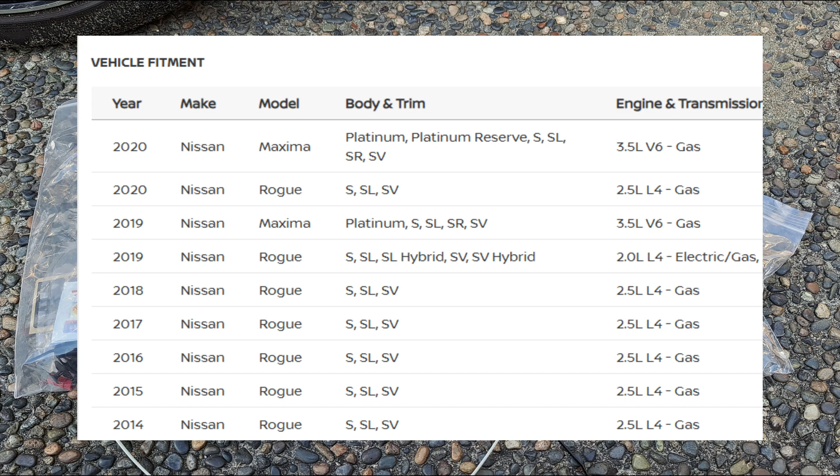In this video I will be installing an underglow LED light for my 2018 Nissan Rogue. This kit is compatible with different Nissan vehicles from 2014 to 2020, as you can see in the vehicle fitment right there. I believe this kit can be installed in a different car as long as you have the right harness for your vehicle model.

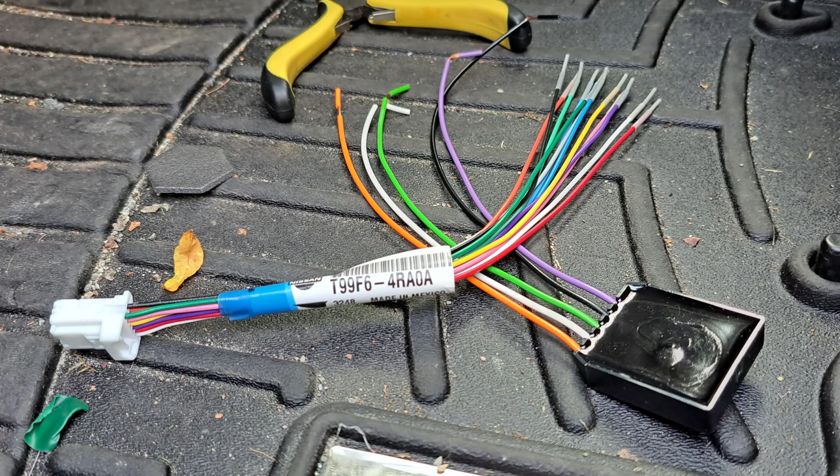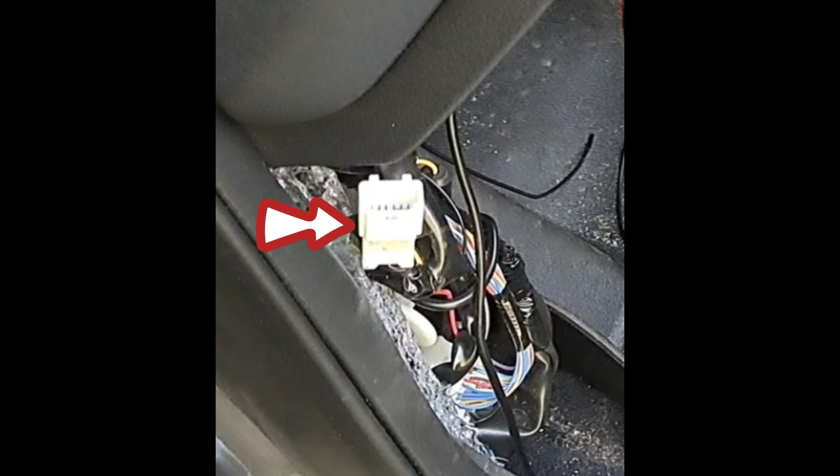By the way, the kit does not come with a harness, so you have to buy it separately, but I would recommend checking the harness connector in your car first. You might have one pre-installed already. It's usually located on the driver's side. You just have to remove the corner kick panel.

The kit comes with everything that you need for installation: connectors, rubber grommet, etc. Again, aside from the harness that is specific to your car model.

Nissan has very good detailed instructions. I will leave the link in the description below. Also take note that the location when placing the sticker guide for drilling holes is a little bit off if you follow what the instruction says, but if you do exactly how I did it in this video, you shouldn't have any issue at all.

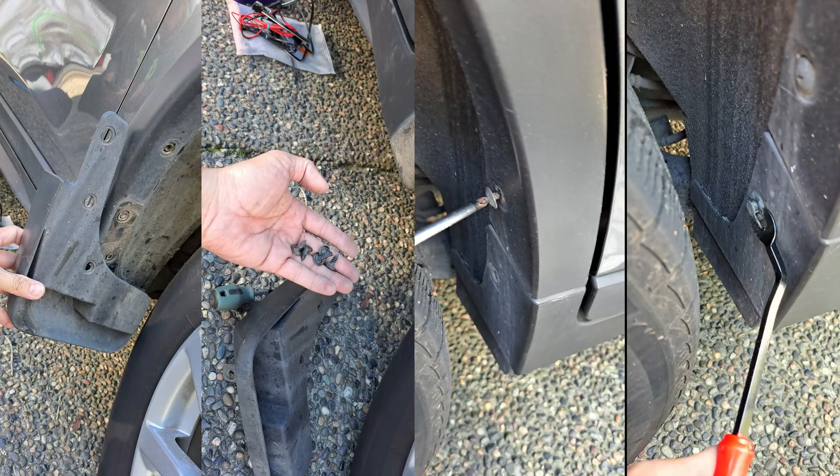So now let me go ahead and show you how I installed it. I started with the passenger side by removing the front mudguard that was held by 3 screws. At the back, you will have to remove 1 screw and 1 push pin.

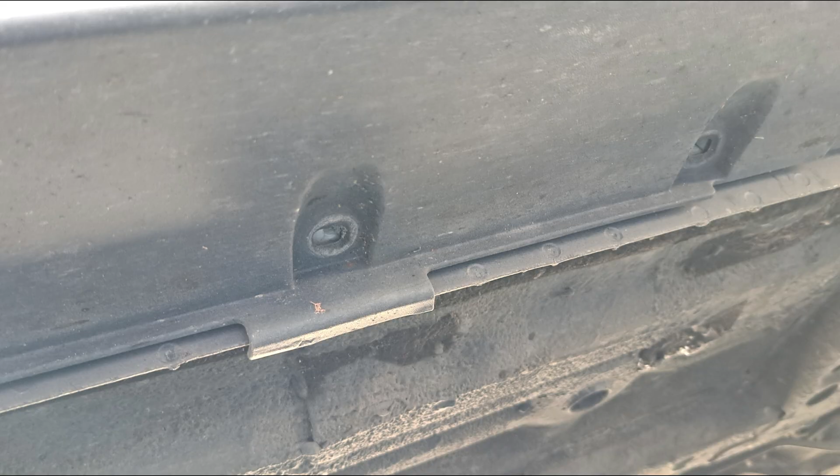Underneath the car, there are 8 or 10 gray screws - sorry, I forgot to count them correctly. Alright, so there is a push pin right here, right there. I don't know how many until up to the front, but you just have to push it down and then try to yank it towards you, and it came off. I'm not sure how easy it is to put back later on, but it's right there.

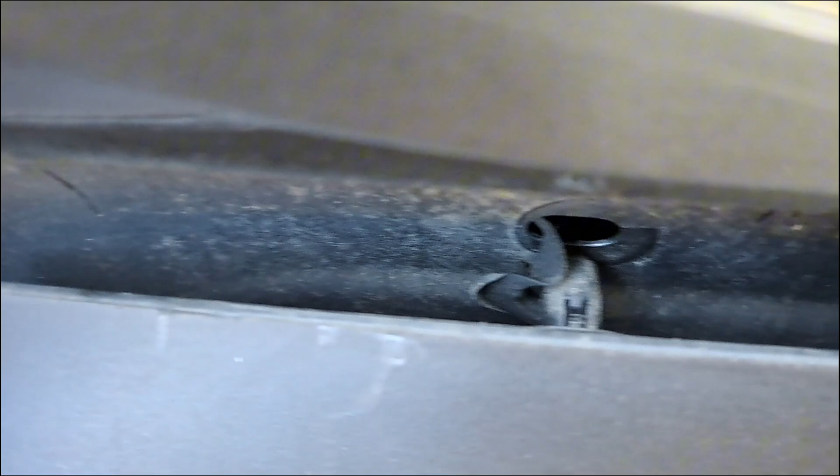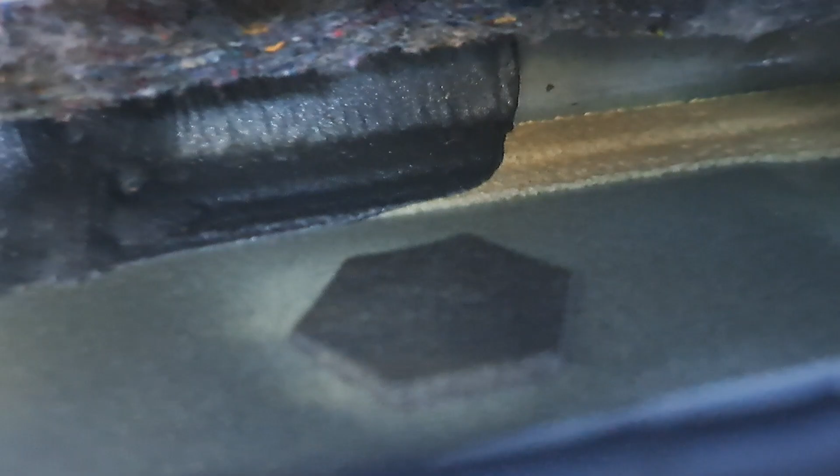From the outside, underneath, the wire is gonna go there. So I ended up removing the trim all the way because I thought there's another hole here at the front, because when I removed this, the first one here, there's a double wall, so there's no hole right there. So the one that you have to remove is the second one from the front. You guys can see right here, you just have to remove this cover here. So I'm gonna put this one back to the very front, and this is what we need here.

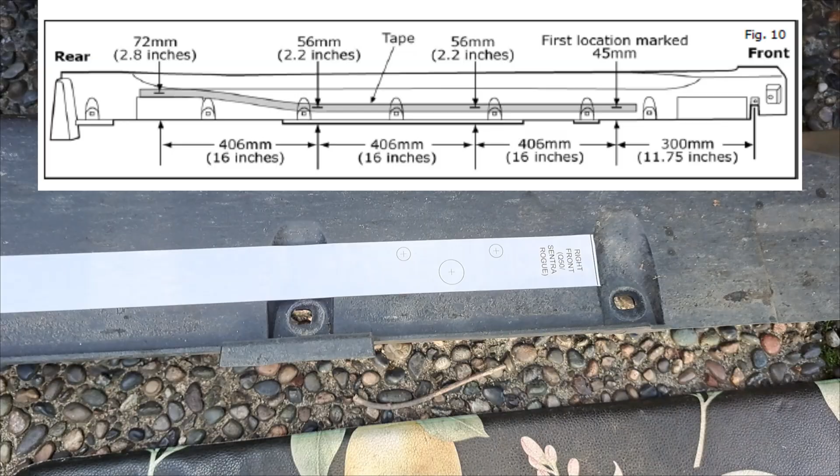So following the Nissan instruction on how to place that drill tape guide, you can see that it is totally off and it's very close to the screw hole, so I moved away the tape and it works perfectly fine.

The LED has orientation, so make sure that you are using the correct sticker. It is labeled specifically for the right, which is the passenger side, and the left for the driver's side. So the first one I already did. Now I'm gonna show you the second one just to save time, because I was trying to make sure that I'm using the right size of drill.

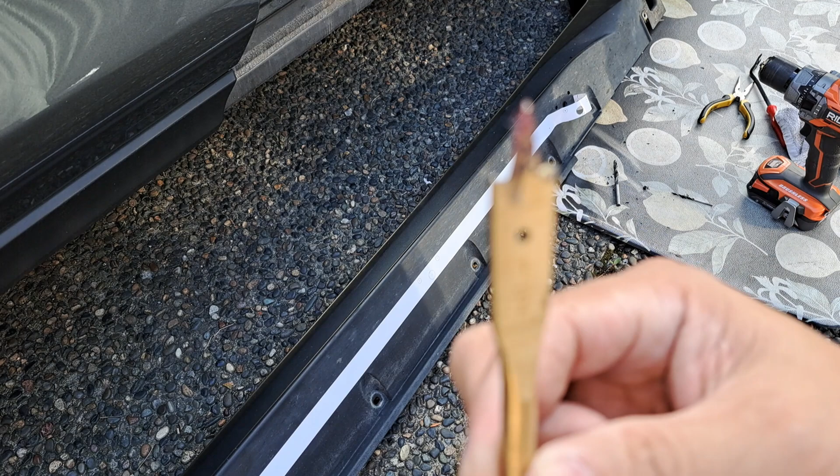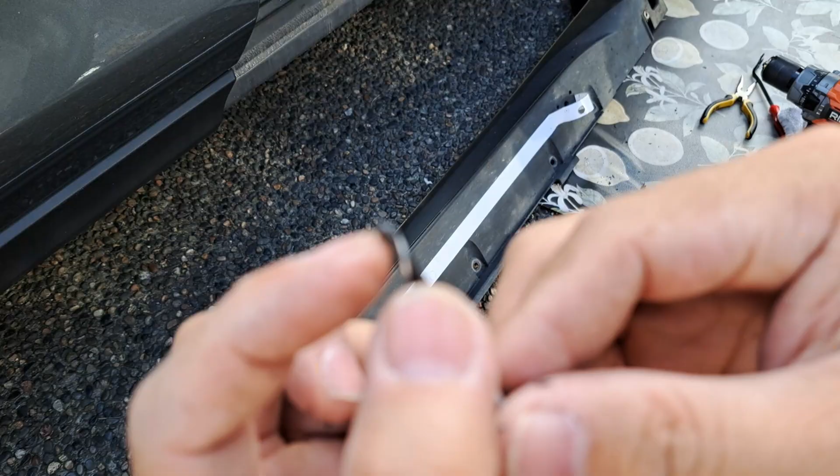So for the LED itself, the size of the drill bit that you have to use is 1/2 inch. I use this kind because it's much faster. This is 1/4 inch for the push pin hole right there. I have a set of drill bits, so that's easy for me. What I did is I started with a small one, because I'm drilling plastic, I use the wood type drill bit because it has a little pointy tip, so it's really easy to start drilling. So again, I'm gonna start with a small drill bit.

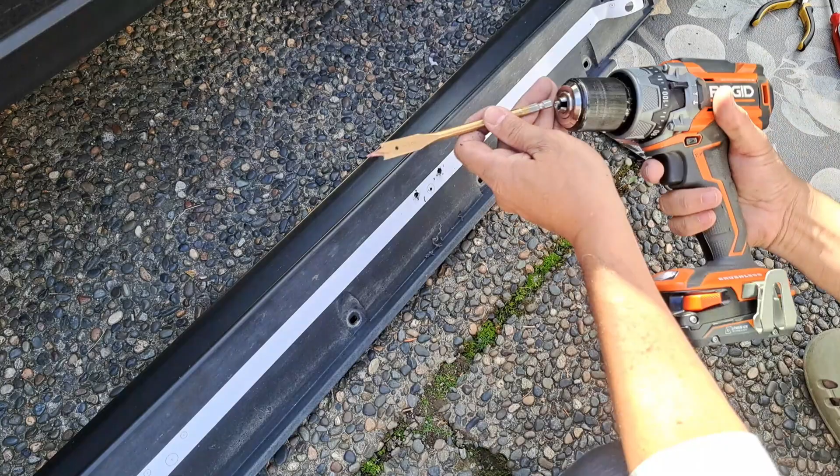The instructions said you could easily drill it while the splash guard is on the vehicle, but I don't want to accidentally drill through the chassis of the car. I'm going to leave the link in the description below for the installation instructions so you guys can check it out before starting.

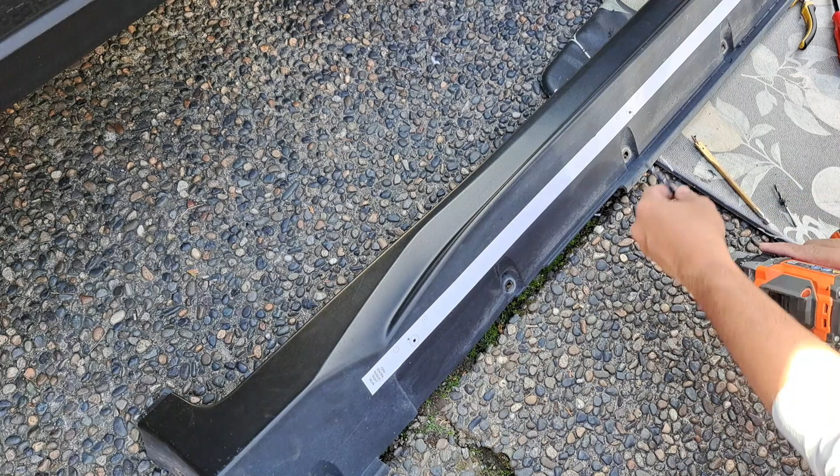Alright, so now let's drill all of them, and then I'm gonna show you guys how the LED lights fit. I'm not gonna use the small one for the push pin, because for this one here I'm also using the wood type drill bit.

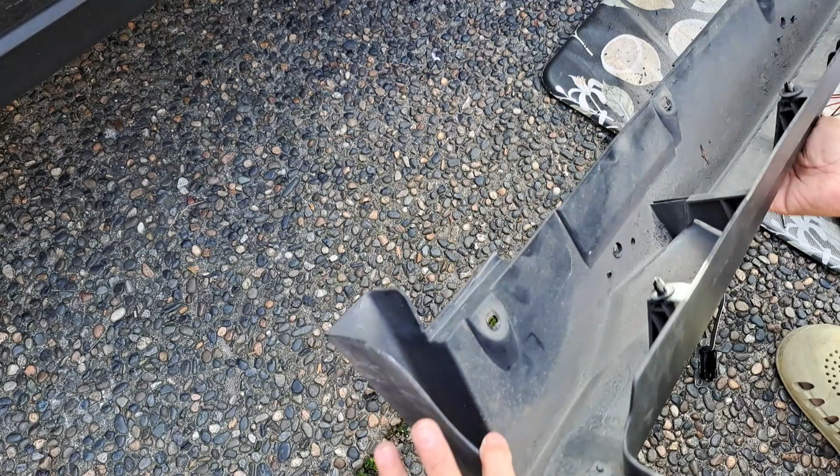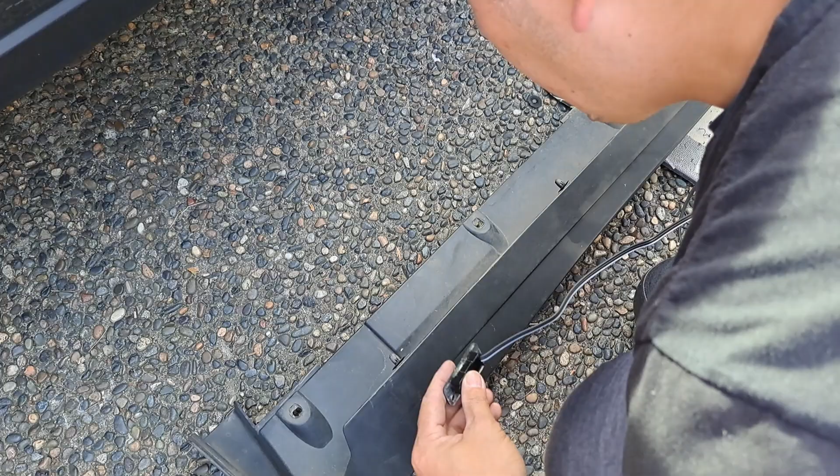Also pay attention to the stickers. It says right front right there, so make sure to use the right one. So this is the one for the right, and it fits perfectly right there.

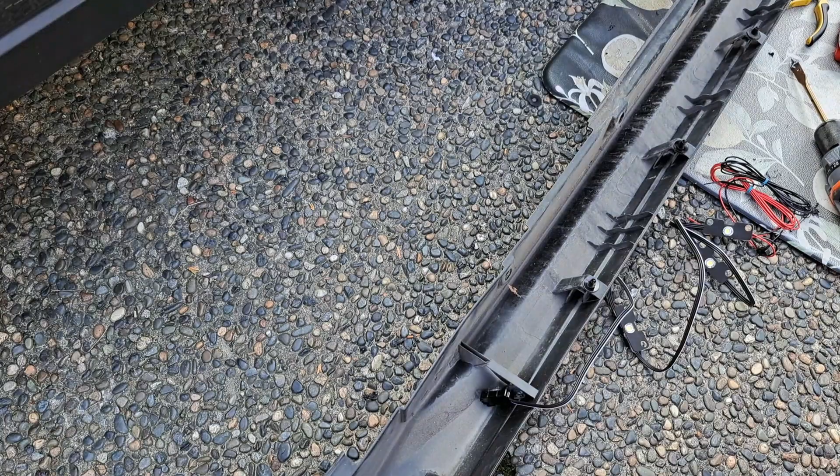And you guys see that it comes with the push pins, so let's try to install it now. You guys can see what I'm doing. Just like that.

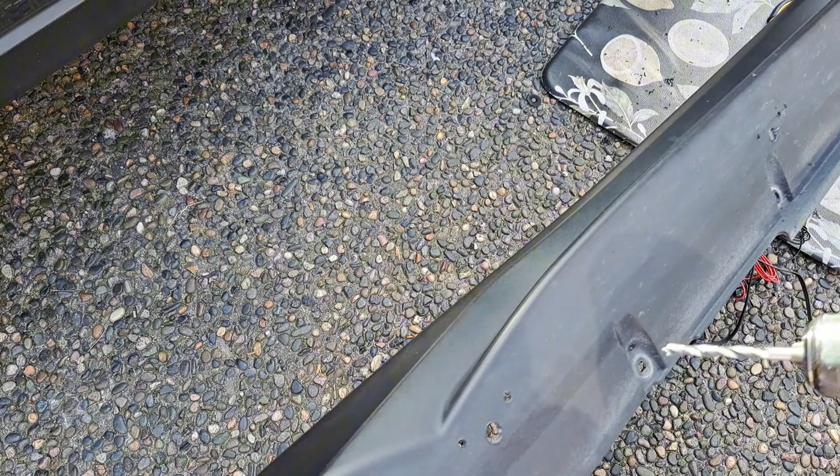Yeah, right there. The other hole is not really aligned, so I can adjust that by making this hole a little bit bigger. So what I'm gonna do is just put the drill on and push it down here.

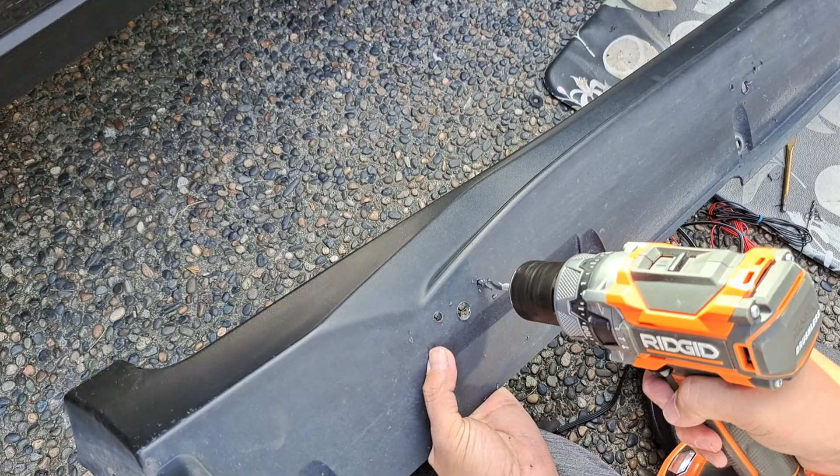This is a screw type push pin actually, so just push that there for now, and then use a screwdriver - where's our screwdriver? It's not really... I don't know where, see? Yeah, it's a screw type, so you can use a screwdriver to tighten it in.

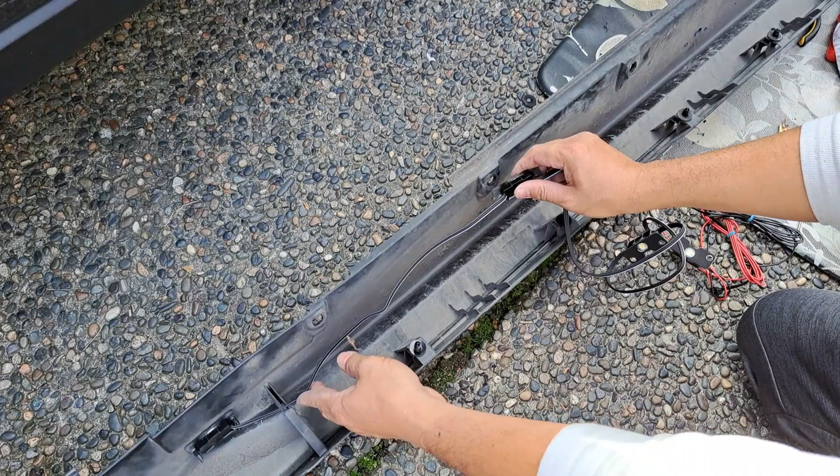So that's how it looks like right now. I think it looks good. Okay, let's install the second one. Just make sure that the wire is not twisted at least.

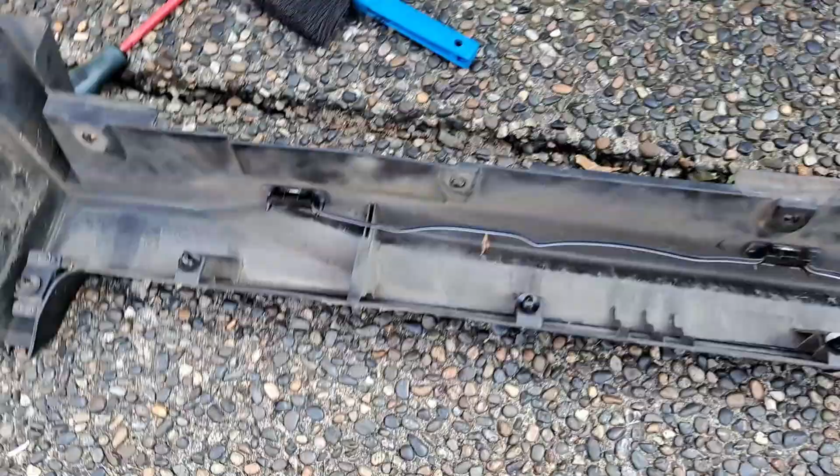Alright, here you go. So before we install it back, we have to fish the wire first. That's how it looks like from the inside. Again, make sure that when you're putting the push pins, the LED has to be really flush to the plastic.

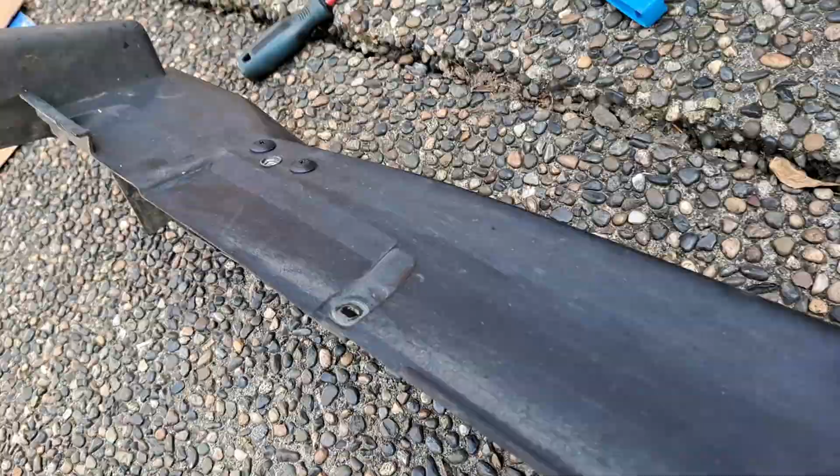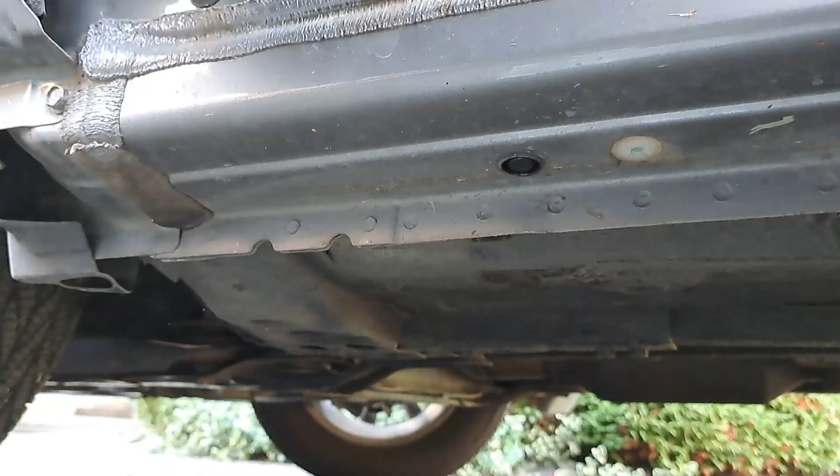And here's how it looks like from the outside. The wire is really long, so that's not a problem. Again, after you remove the side trim, you can see lots of hole covers underneath. You have to remove the second one from the front, because I removed the first one from the very front, and there's a double wall, so it's not gonna go through here.

It's supposed to be closer to the hole in from the inside, but that one is double wall, so you have to use the second one.

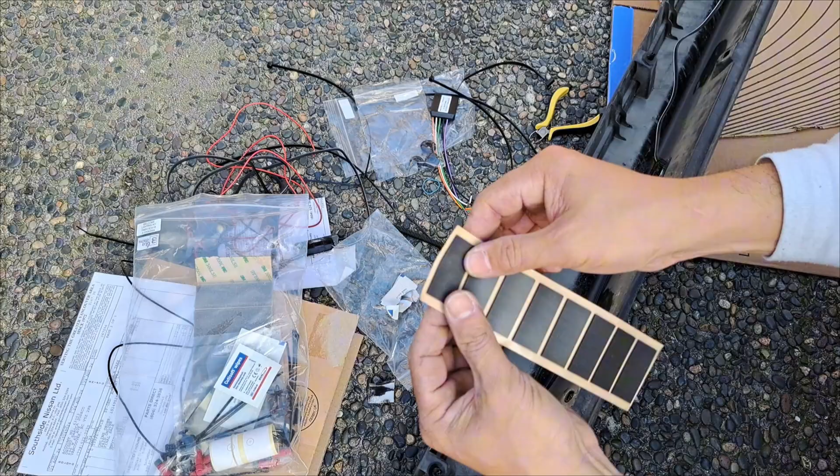Actually, before fishing the wire, I decided to install the wire protector and the rubber grommet first. Also, the kit comes with cleaning wipes, foam tape, and zip ties that you can use to secure the wiring in place so it won't get pinched when you install the splash guard back later on. Again, the kit comes with everything you need for this LED light installation, aside from the specific harness that you have to buy separately from Nissan, or probably you can get it from a third party or local auto parts supplier in your area.

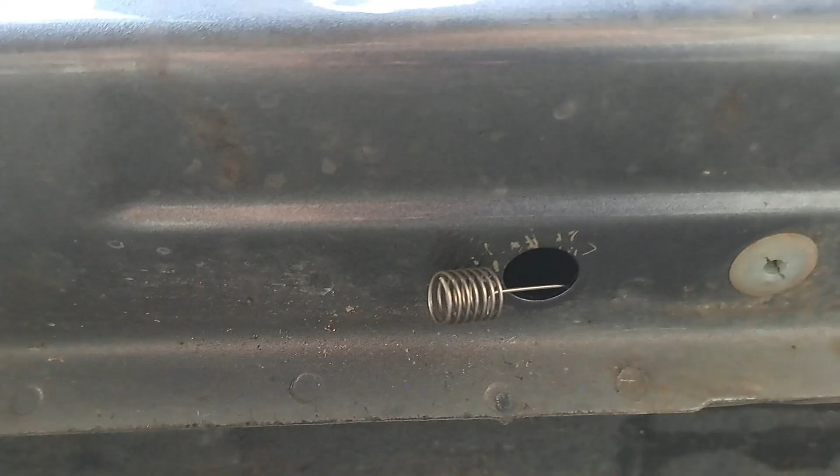Alright, so the real challenge is to fish the wire in here. And I'm lucky that I have this fish wire from the hitch that I installed on my Odyssey before. I kept that, and that's the one I use. I can't tell you exactly how I did it. I'm gonna try to show you that on the left side, but it's here now.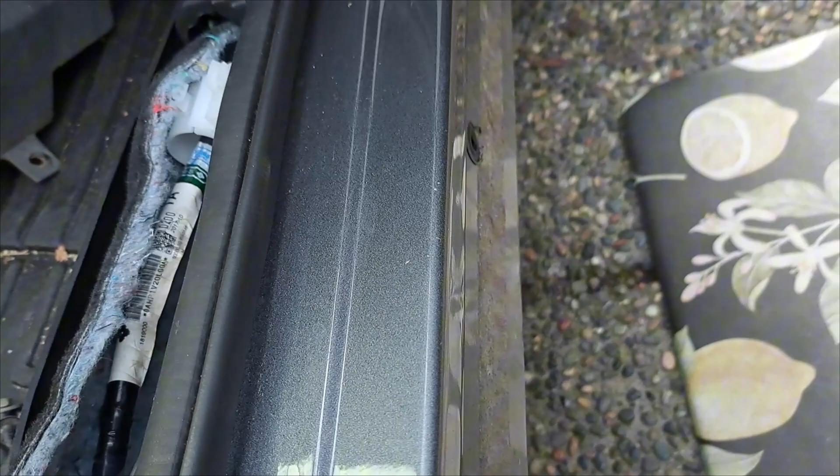Look at that. Alright, so I managed to get the other end of the wire. Oops. Oh, that scared me. It's gonna go in again. I cannot show you right now, but I'm gonna show you on the left side how I did it, because this is the challenging part here - to fish the wire.

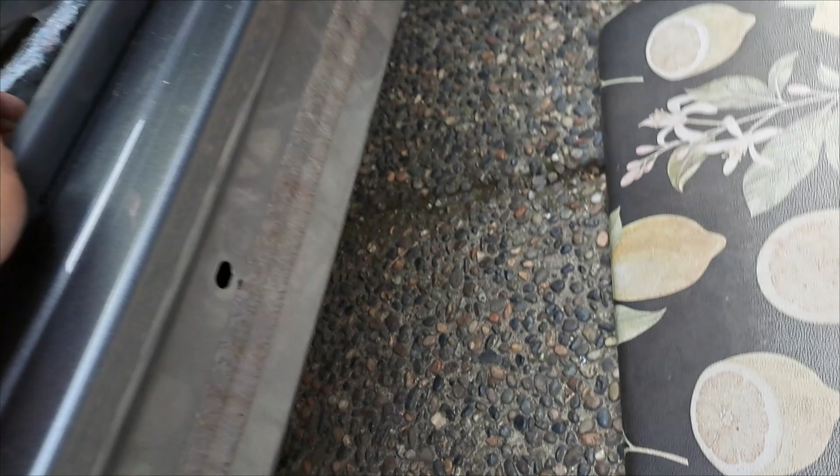And yeah, aside from removing the trim, after that I guess everything is gonna go smooth, like connecting the wires - it should be straightforward. So right there I put the string and secured it with electrical tape. Now I'm gonna pull this. Hopefully it's not gonna get stuck somewhere.

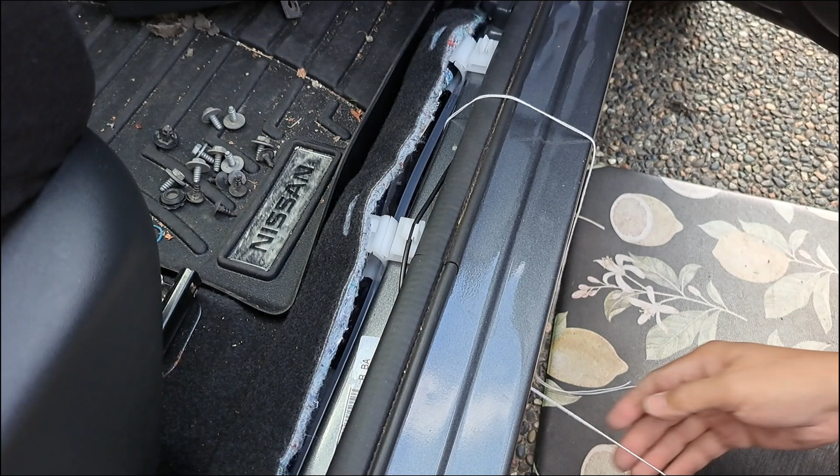Right, so now I'm going to remove it here, and then I'm going to attach it to the wire of the LED, and then pull it again, and that should do it.

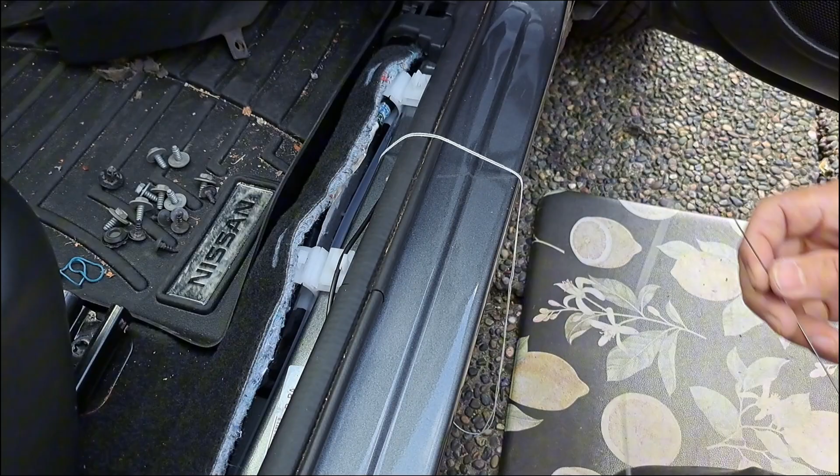Right, so this is the one I use now. It doesn't look good anymore, but I attached the string to the wire using electrical tape. Make sure to stretch the electrical tape while wrapping it so it holds the wire properly, then pull the wire gently until it gets through the hole inside the car.

There you go. Hopefully you guys can see what I'm doing. It's straightforward, so easy. Yeah, so right there, that's just gonna go there.

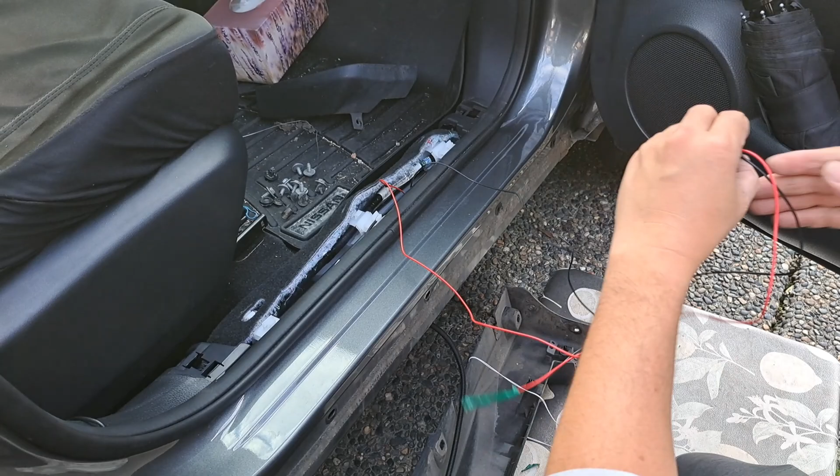There you go. It's easy to install. That's it.

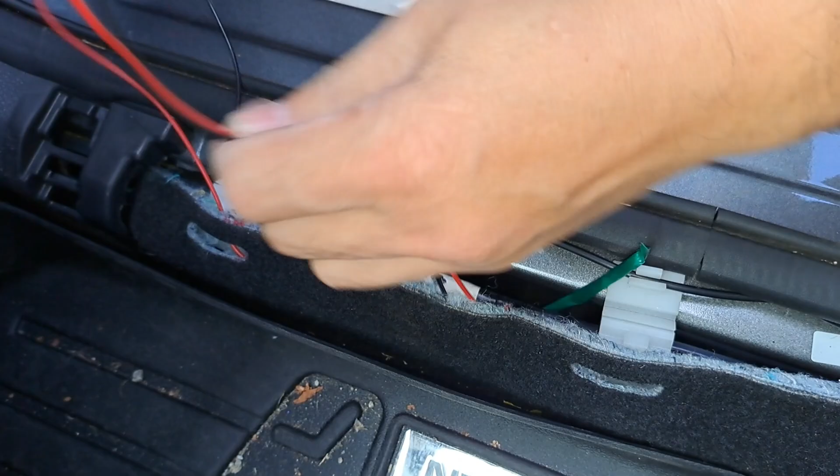Alright, so the wire is in. Now we're gonna install the trim back and then do the other side before we connect the harness.

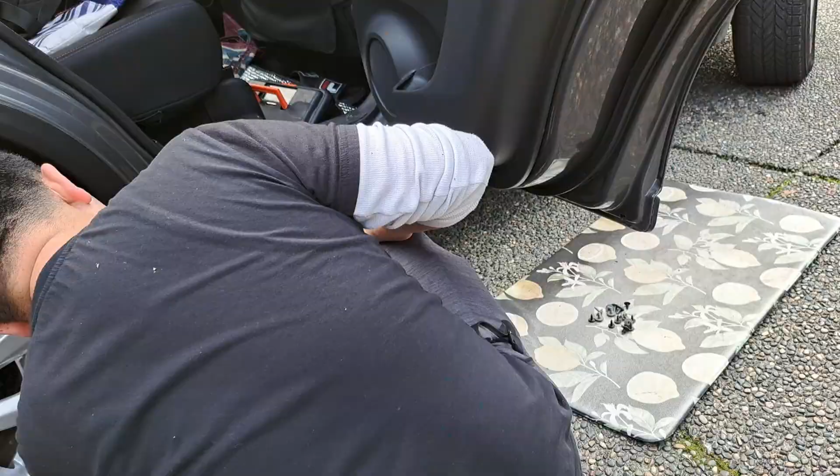With the help of my buddy, installing the splash guard back is quite easy. I just need to do some acrobatics on the ground, as you can see right there. Also make sure all push pins are in the holes, and don't forget to put all the screws back, and make sure none of the wires are pinched.

Right, so it's time to do the driver side.

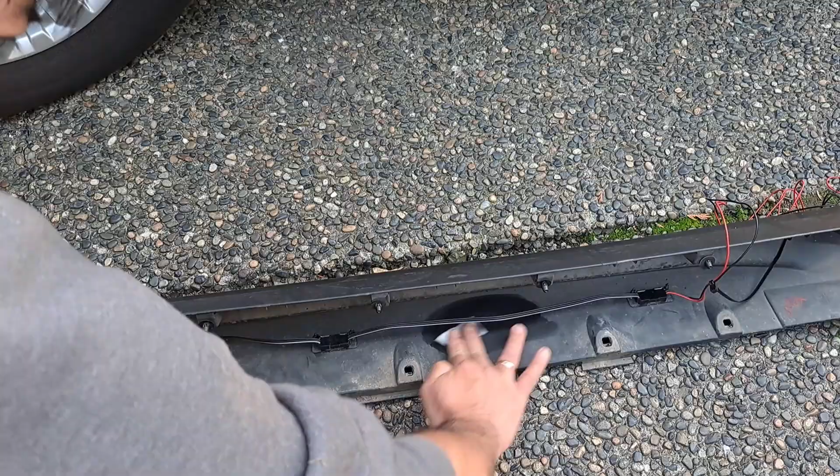So let me show you again the hole underneath the car. It's right there, and the inside hole is also right there. I already removed the cover — it was just a foam tape. We are going to replace it with the rubber grommet later on.

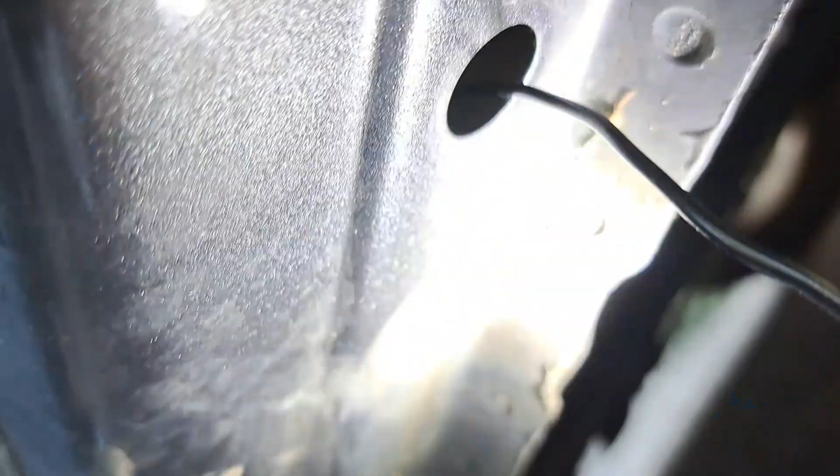It's really hard to see, but you guys can see there's a hole close to the inner wall, because there's a wall right here, like a divider wall. Okay, so I made a drawing so I can explain it better.

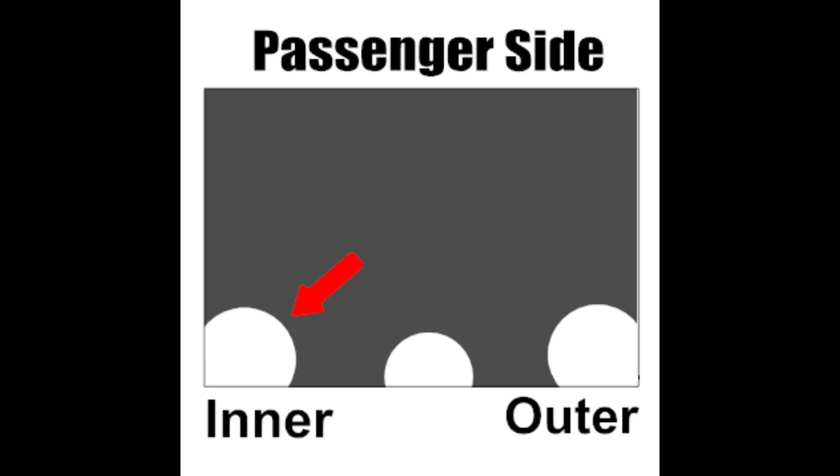So here is the passenger side. As you can see, the arrow is on the opposite side, and take note that this is based on my experience installing on a 2018 Nissan Rogue. If you're installing it into a different car, the situation might be different.

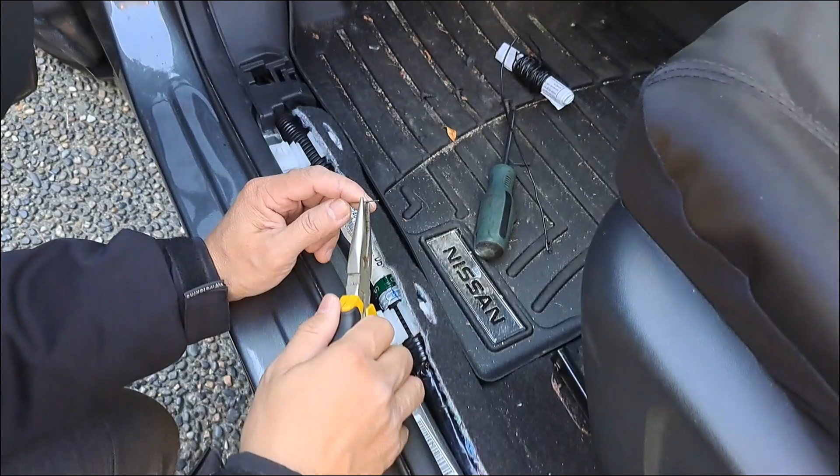At this point I use another wire to fish the first wire, bend the end of the wire, and use the same string to pull the wire of the LED lights.

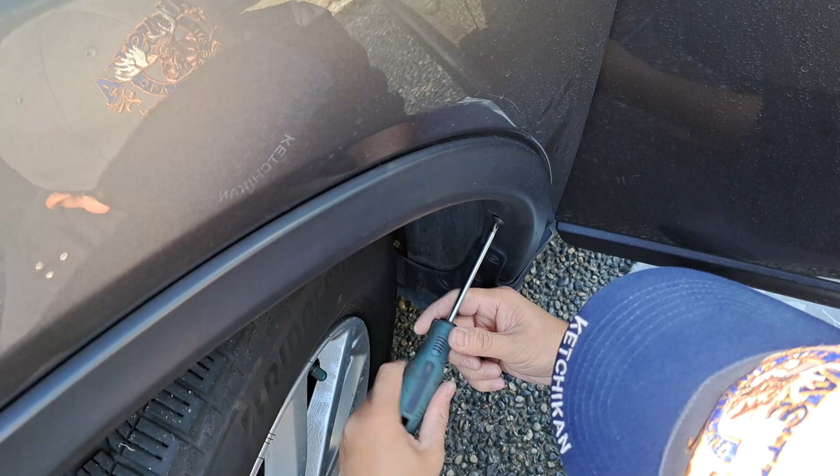Alright, so I have to remove the mudguard again because I forgot one screw. I was wondering where it goes, and I remember there's another one right there covered by this part here.

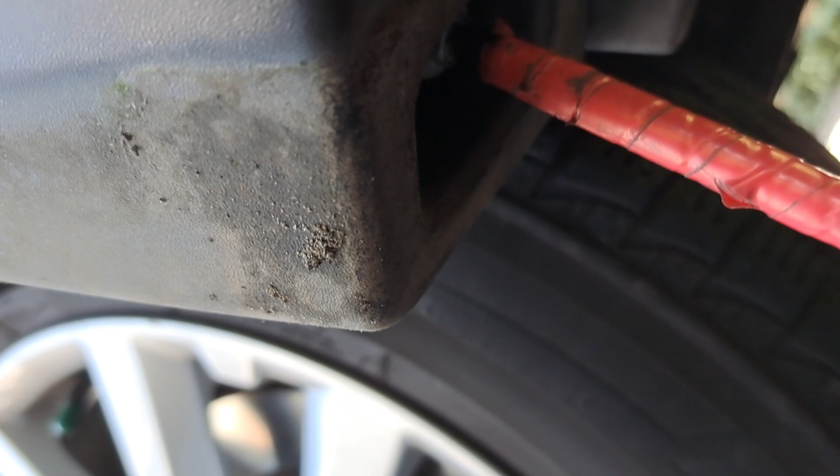So yeah, don't forget this screw here. That's why I was pushing it with my knee while putting in the screw of the mudguard, because this screw here is missing. There you go. Let's see if that's it — so don't forget the screw here.

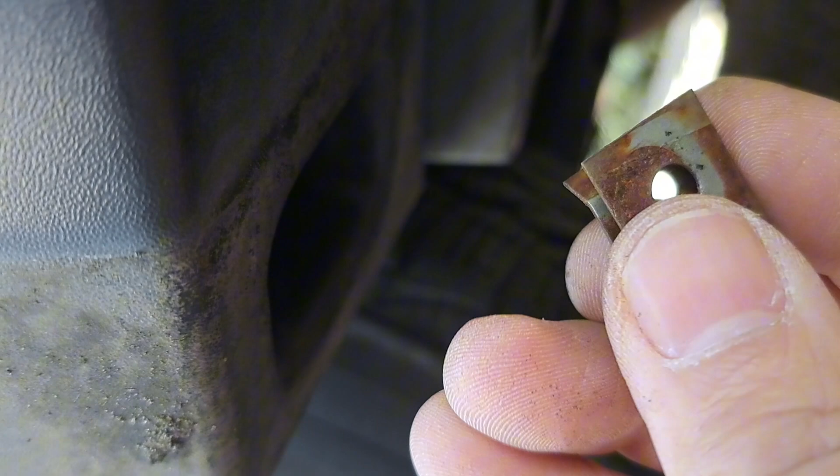And the black screw that goes right here, goes right here in the metal bracket. What you have to do is compress this a little bit so the hole will align. Alright, so it's time to install the harness. Here I am removing the kick panel under the driver's side.

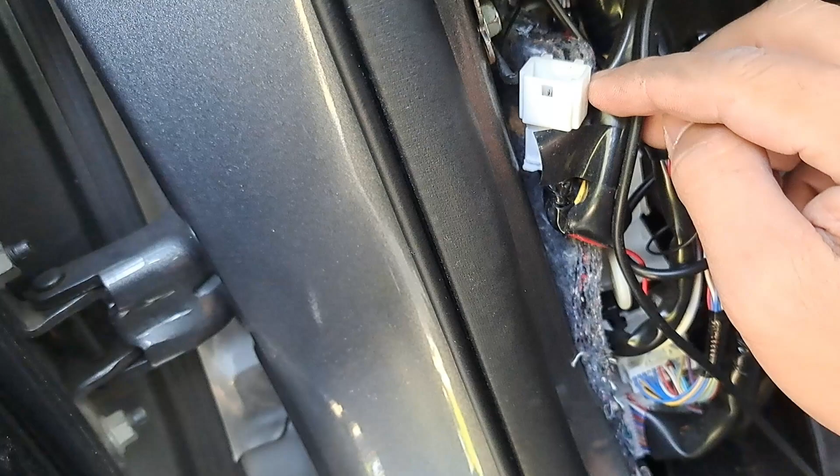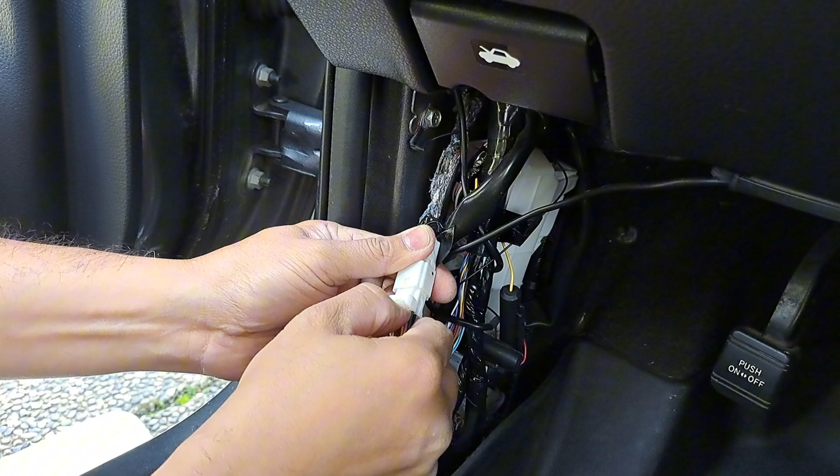So where is the connector here? Oh, here, I think this is the one. Yeah, it's sitting there, should be this one. Let's... yeah, that's the one. There's a hole here, so it should go right like that. Press this thing. Why doesn't it go? Make sure everything is straight.

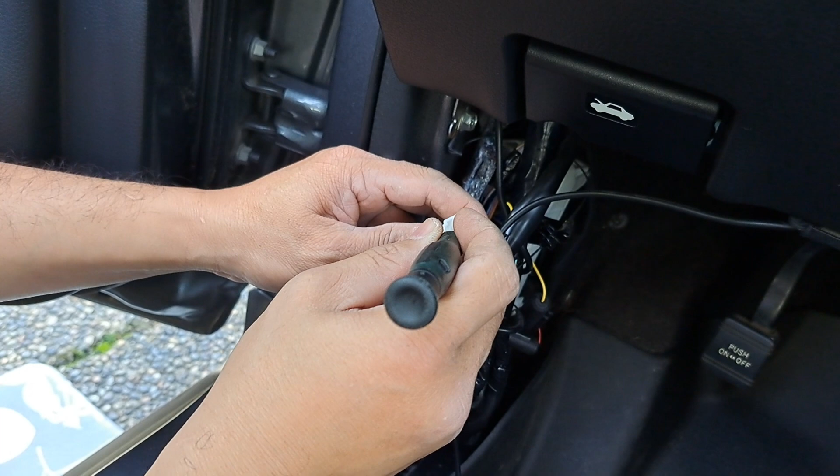Alright, so one pin of the connector is bent. So if it doesn't go in, don't force it. Right there, the second one is bent too. The second pin from the back is almost touching the third one. I was trying to fix it, and if you touch the third one, look at that. Let's see now if it's gonna go in with no issue.

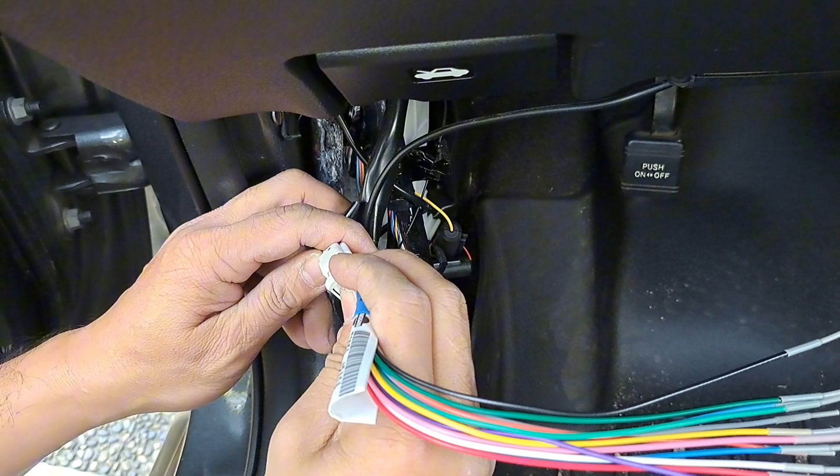There you go. Well, this one is safe anyway, it's all covered, but I'm gonna remove it again. I'm not gonna leave it attached while I'm trying to connect all the wires, so it's better to connect the wires first before connecting the harness. So I'll just leave it like that.

Here I use my wire connector to extend the wire of the passenger LED lights so that it would reach the control module we'll be installing to the harness on the driver's side. So here I use the fish wire, attach the wire right there. The extension wire I connect here to the passenger side is from the driver's side, very close to the harness anyway. So I cut that, got about 2.5 feet additional, so hopefully it will reach the other side.

I already tried it. I just slip it here and then it's gonna go through the other side for sure. There's lots of room here. Okay, can you see it there now? Yeah, if you can see it, you can pull it.

Yeah, pull it if you can grab it, and then pull it slowly. You can bend it, bend it from here. Oops, you can see there. Alright, so pull it slowly. Okay, go. More, and then really slow because the connector is there already. So I think that's good enough. Yeah, good enough.

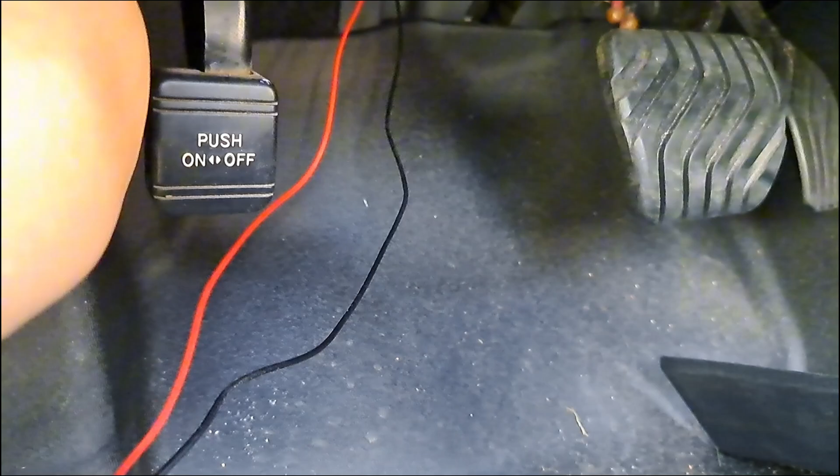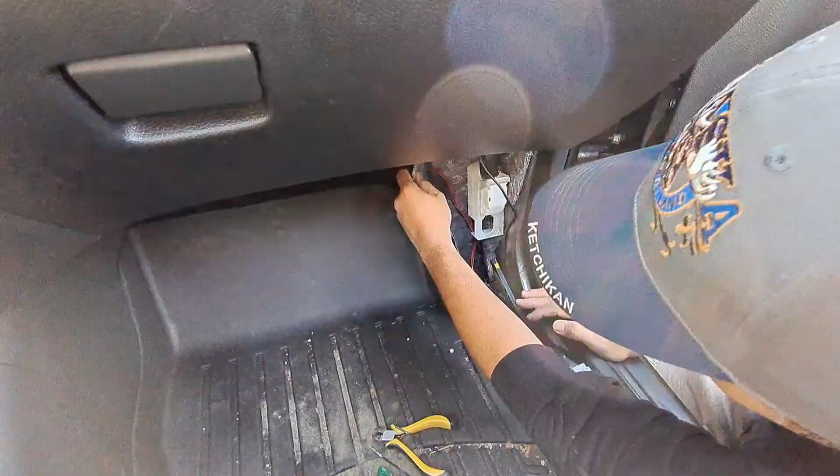And the connector that I made right there, we're just gonna secure it with a zip tie later on, and insert it inside the carpet. So what I did here is just hide it inside the carpet right there. It's not gonna go anywhere. There you go, now it's hidden.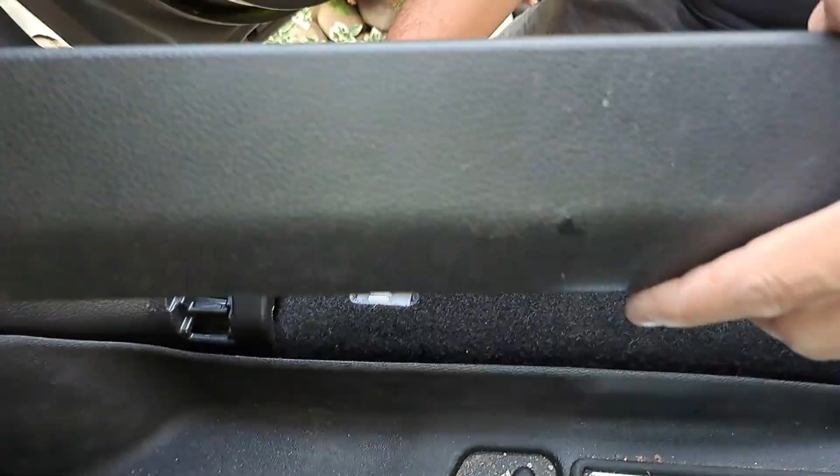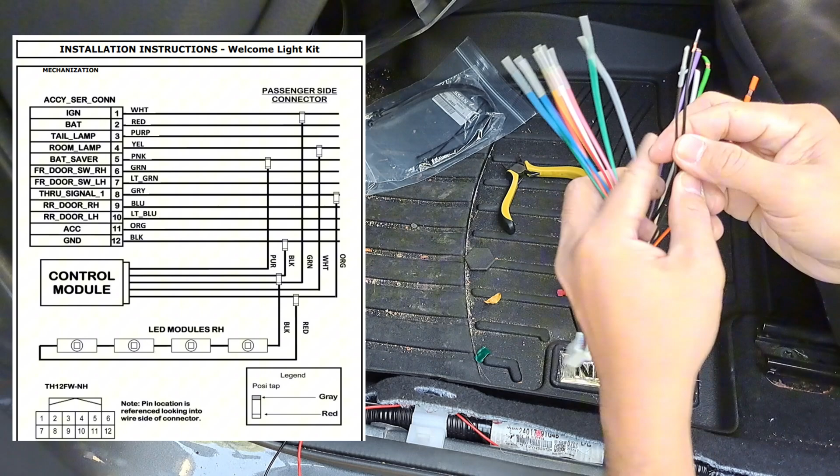Right, so according to the installation instructions from Nissan, the black goes to the black, that's the ground. Also the black from the LED itself, but the positive of the LED, red, goes to the orange of the control module, and the harness is gonna go to the gray one. So this is gonna be the positive and the rest is gonna be the negative, all black.

Right, so the gray one goes to the gray. You guys can see what I'm doing here, you just insert the wire here like that, and then there's a pin that's gonna poke the wire once you close the cover. That's gonna poke the middle of the wire. And then the other end, I'll show you guys later. Let's just close this one now.

Maybe just pull this a little bit, right, like that. And it's gonna twist that until, I think that should be good.

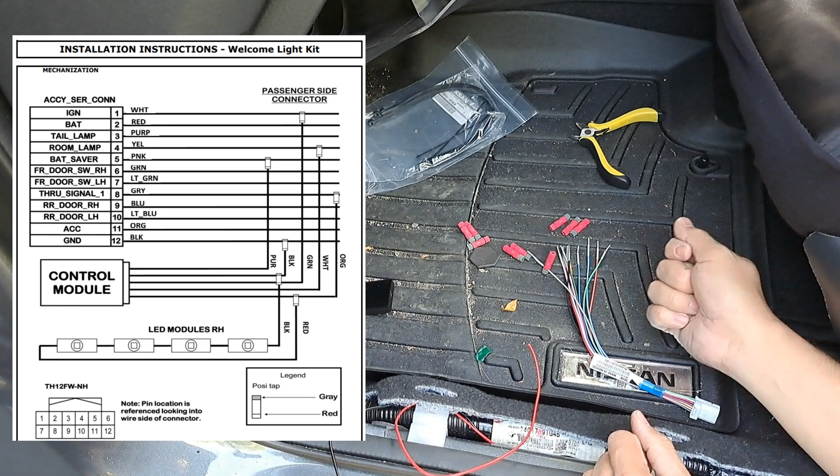Right, so we got like 9 connectors actually, so it's just perfect for all the connections we're gonna do, like 3 wires here that's gonna go to the ignition, and also 3 wires that's gonna go to the positive and negative for the LEDs, and the one from the control module. So I'm going to attach like 3 connectors here for the gray wire.

Alright, so I made a mistake actually. I was supposed to put the connector to the orange of the control module. Only one connector here goes to the gray one. The rest, the 3 connectors, go to the orange for the positive of the LED, and then this thing is gonna go here actually. That's not a big deal, just gonna take that off.

Right, so there you go. The only thing is we poked the wire right there, but we're just gonna cover it with electrical tape. That's not a big deal.

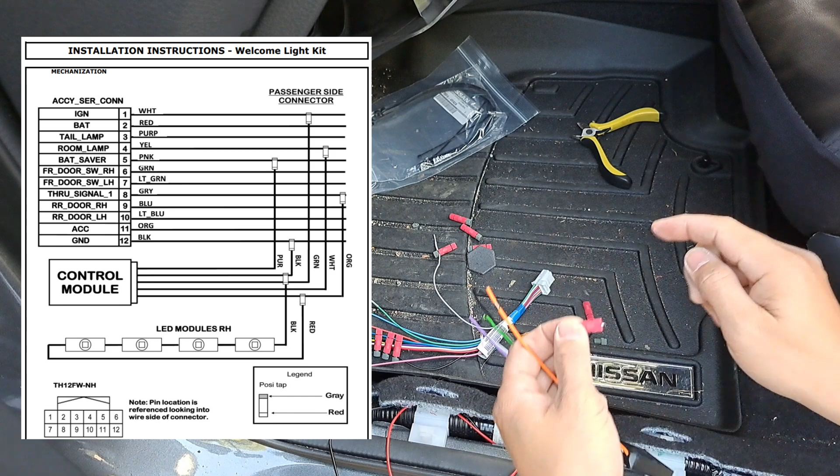So again, you have to be careful to put the connector to the right color on the module or the harness. Double check again - orange, yeah, the positive of the red, positive of the LED is gonna touch the orange. It's okay actually, because only one here, not 3, like 2, the orange, because the end of this is gonna go attached to this connector here later on. So let's just put like 2 here. Hopefully this is correct now.

So here you have to make sure that you have room for the cover, because this open wire is gonna wrap around this connector here. So just gonna spread that like that. I guess it should be good.

I never used this type of connector before, so it's supposed to be like that. You can see it's gonna be wrapped around there. Let's see if it's gonna hold it. It's gonna push that. It's holding.

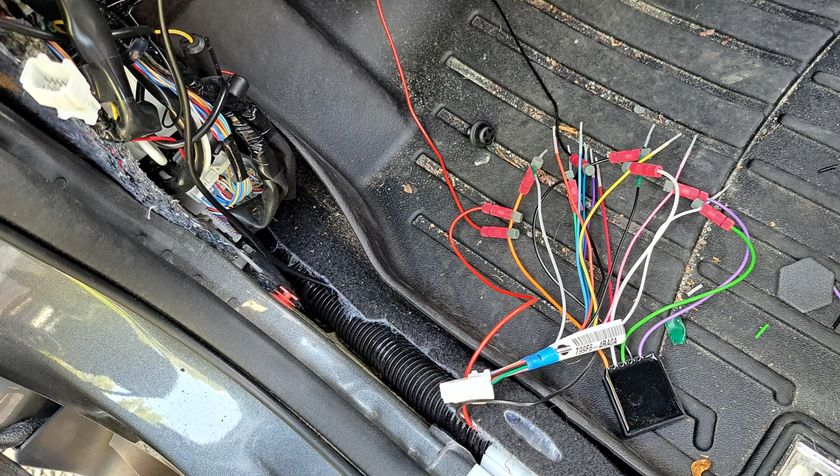Alright, so I double check all the wires. Seems like I did everything right. And I think it's time to plug it into the connector here. There you go. And then it's time to test it.

Then I'm just gonna do the wire management after that, hide everything under the carpet. And then there's lots of room here to hide this module. I'm not sure if we can just zip tie it here later on, but we have to try it first.

Okay, so it's connected. Now the door is open. The LED should be lit. There you go, yeah, they're all working. It's only 4 LEDs right there, and the last one.

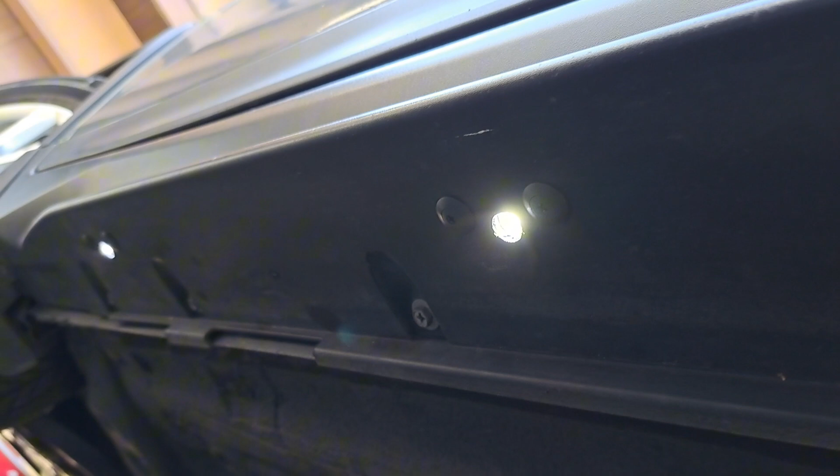So I'm gonna ask my friend to use the remote. I'm gonna close the door. Let's see if it's gonna turn off. Give me a second here. Right, so can you lock it? There you go. Can you unlock it again? I mean unlock now. There you go.

And then let's wait and see. I don't know how long it's gonna stay on, but again, they're all working now, so we did all the connections correct. Oh yeah, there you go, now it's off.

Right, so I think that's a concluded installation. Okay, so right now we're gonna check to verify that when the engine is running, the shifter is still in park mode. Once the engine is running, suppose all the doors are closed, the LED is supposed to turn off, because you're not allowed to drive the car on the road with the underglow LED. It's not allowed in Canada, so you're gonna get a ticket if you do that.

All right, so start the engine. The wire is still there, I haven't done the wire management yet. All right, so the engine is running. Let's see, I'm just gonna go under here to check. Right, so the light is off.

If I open the door, also the light is off. Yeah, so right now it's off, even with the door open. Can you turn the engine off? Oh, there you go, now the LED is on. So that's how it should be to be legal in Canada.

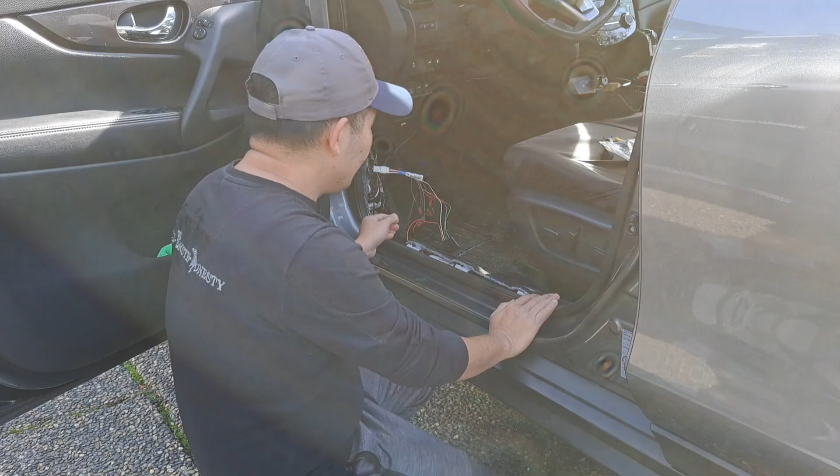I don't know if some other countries allow the underglow LED, probably not as well. Alright guys, so that's the complete installation of underglow LED lights, it's an OEM from Nissan. So I'm gonna do the wire management now, and I think we're all done.